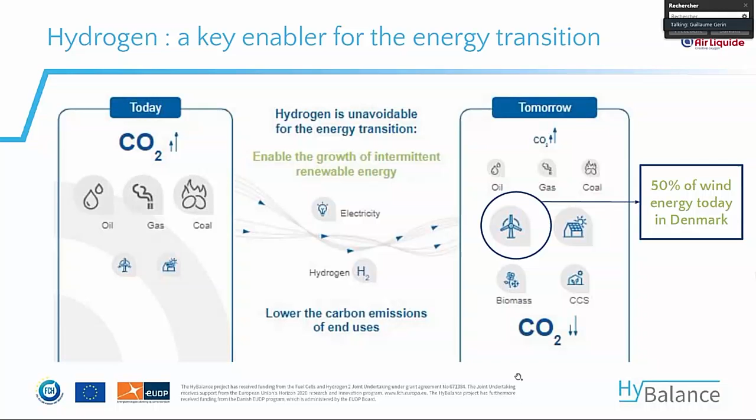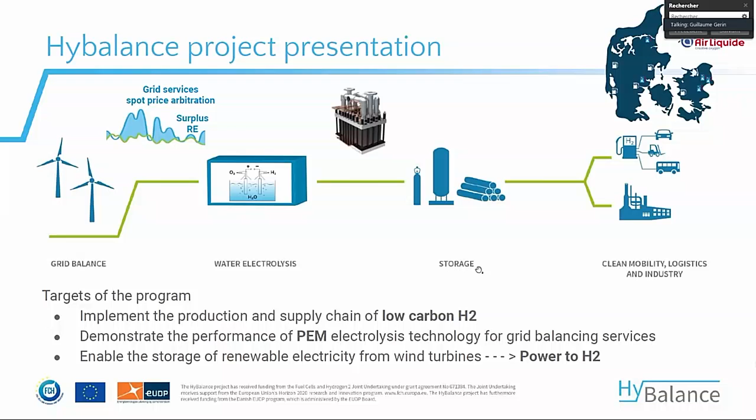Looking at the project in more detail, the idea of the HyBalance project is to demonstrate the overall chain of power to hydrogen - from the production via water electrolysis, basically using wind energy from the grid, making low carbon hydrogen. This also includes storage of the hydrogen, which acts as a buffer. The idea is to produce hydrogen when there is a lot of wind energy in the electricity grid, so that we can store this excess electricity as hydrogen and later supply it to customers, both for the mobility market and the industrial market.

Another very important point of this project is to demonstrate the maturity of the PEM technology. This is an important step because it's a first-of-its-kind plant in real operation under industrial conditions. This technology is very interesting for providing grid services, especially on the primary markets, and also to regulate the secondary and tertiary frequency markets. So this gives a global overview of the program and explains the principle of power to hydrogen.

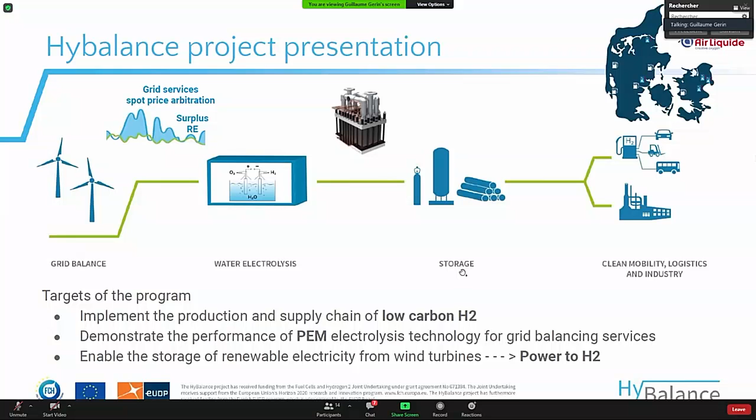Looking at the figures of the program, it started in October 2015 and will end at the end of this month. We are almost completed, but that doesn't mean the HyBalance plant will stop producing hydrogen - there are a lot of hours ahead where the HyBalance plant will continue to perform. To give an overview of the project budget, this is a 15 million euro project with a very important contribution from the Fuel Cell Hydrogen Joint Undertaking, more than half of the budget, for which we can thank them.

And another important contribution is from the Danish authorities, EUDP, at a level of 2.6 million euros. So just to give an overview also about the partners.

As explained, we have Air Liquide, who is in charge of the project management and the construction and operation of the plant. There is also LBST, who is in charge of the environmental assessment and coordination of this task. We have Hydrogenics, now Cummins, who have manufactured the electrolyzer and installed it also on the plant, and doing also some maintenance on that.

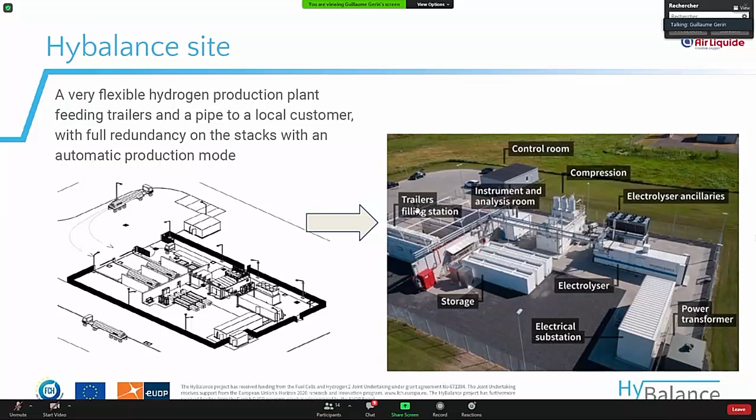So this is for the introduction of the HyBalance program. I will give the floor to Tejs Laustsen Jensen to present session 1 and to introduce the different partners.

Thank you very much for that, and thank you for the presentation and the introduction to the program, it was very informative and thoughtful. Thank you also to the whole consortium for inviting me to moderate today's webinar. My name is, as Guillaume mentioned, Tejs Laustsen Jensen. I'm the CEO of Hydrogen Denmark, the national Danish hydrogen and Power-to-X organization. In that capacity, I also want to express my admiration for the partners for making the project come true. But also, I have the pleasure of being a board member of the EUDP, and as Guillaume mentioned, we have contributed also to the funding of the program. So in that capacity too, it's very nice to see that the project has moved along so well. But again, it's not my point here to say too much, it's my point to moderate what everybody else is saying and telling us about the project.

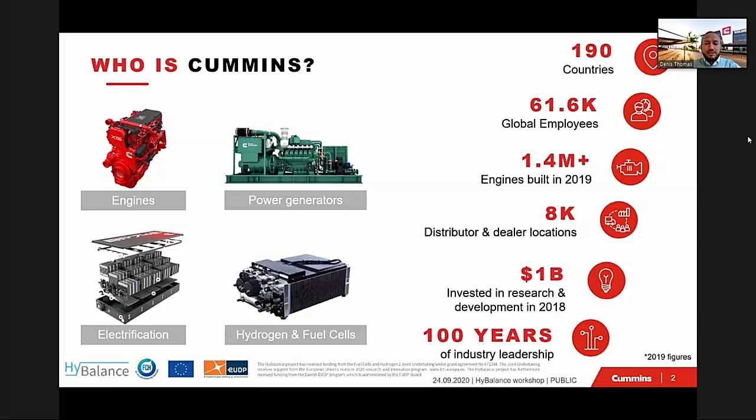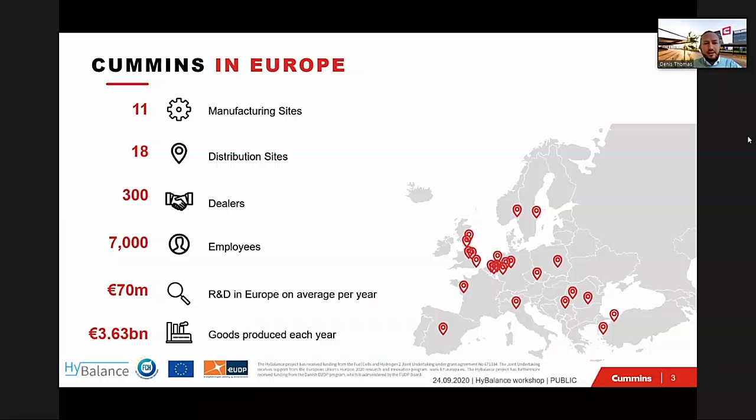Cummins is a true global company with a presence in more than 190 countries and more than 60,000 employees. The company owns its own distributor and dealer locations, with more than 8,000 locations, and invests quite massively in research and development. In Europe, we have more than 7,000 employees, 11 manufacturing and 18 distribution sites.

To summarize the activities of Cummins in the field of hydrogen, we work on several technologies: alkaline and PEM electrolysis, solid oxide and PEM fuel cells, and recently hydrogen storage tanks. This is mainly due to acquisitions and partnerships, with General Electric on solid oxide fuel cells, the acquisition of Hydrogenics which was the most important one for electrolysis and PEM fuel cells, a partnership and participation with Loop Energy in Canada, and a joint venture with NPROXX in Germany for hydrogen storage tanks.

The idea is to provide a complete hydrogen solution for both the mobility sector and hydrogen generation. In Europe we have two main manufacturing sites: one in Belgium, where the electrolyzer system was built for the HyBalance project.

We also have another site in Germany busy with fuel cell integration, for instance the integration of the fuel cell in the hydrogen train of Alstom.

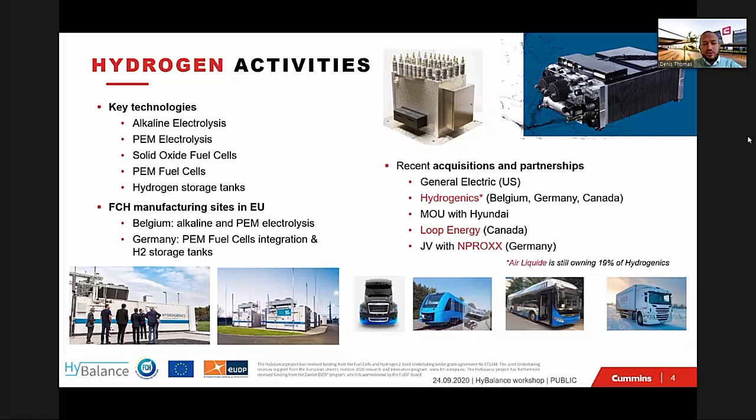HyBalance was a PEM water electrolysis project, and its timing fit perfectly with our technology roadmap at the time at Hydrogenics, because we started working on PEM already in the late years of the previous century, doing R&D especially from the PEM fuel cell team. We had a small product already in 2003, but at a very small scale.

It's really in 2012, when we saw the first signs of the real energy transition, that we decided to invest in PEM technology, especially for megawatt scale capability. In 2014, we manufactured our first 1.5 megawatt cell stack, which was installed in a project in Germany, our first real megawatt project.

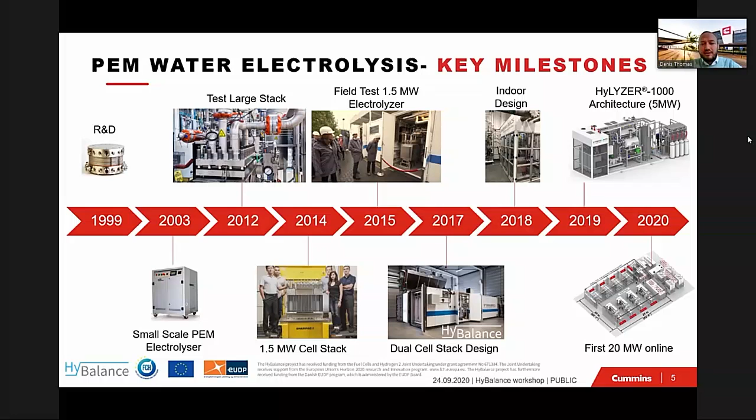But the real interest of the HyBalance project, which was decided in 2015, was to test a dual cell stack, meaning two cell stacks in the same system. After HyBalance, there were additional developments that will be presented at the end of the presentation.

Let me give you a view of the core technology deployed in the HyBalance project. It's based on a PEM cell stack, in this case a 1,500 square centimeter PEM cell stack. The cells are placed horizontally, and the maximum capacity of this type of stack is 250 normal cubic meters of hydrogen per hour, equivalent to more or less 1.25 megawatts nominal capacity, with the possibility to operate in overdrive mode.

This view of the HyBalance project has already been presented by Air Liquide, but you can see the electrolyzer located at the top right of the picture.

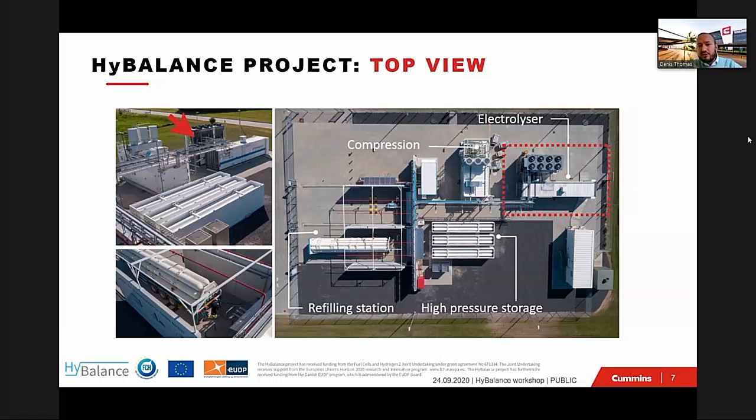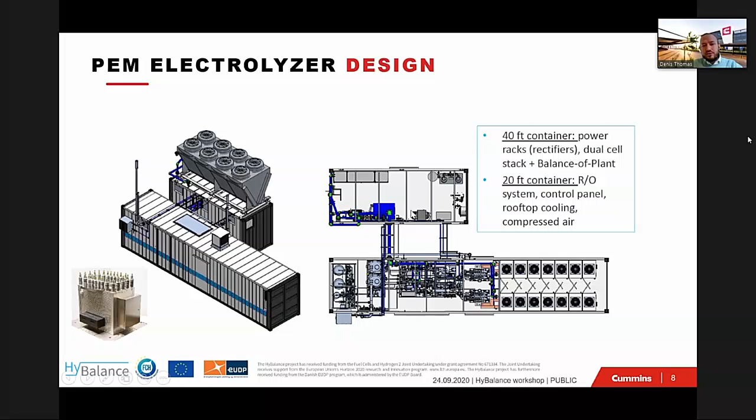If we look a bit deeper into the technology, it's made out of two containers. One 40-foot container includes the power rectifiers, as well as the stacks and what we call the balance of stack or balance of plant. The second container holds all the utilities: the reverse osmosis system, the control panel, a big rooftop cooler, and also an air compressor.

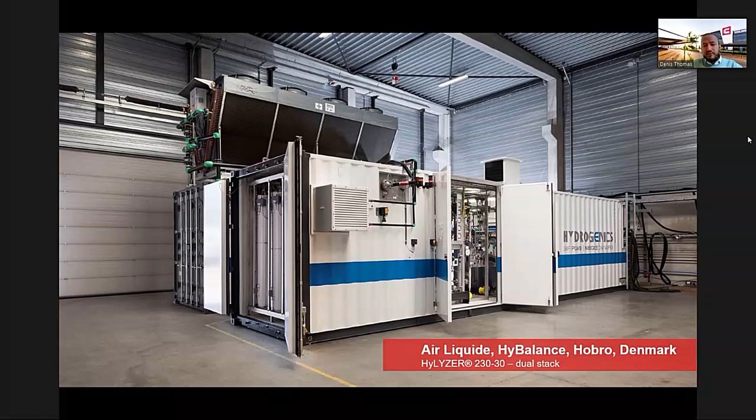Here is a view of the unit before delivering it to Denmark, still in our factory in Belgium at that stage. And here is the system deployed on site in Hobro, in the center of Denmark.

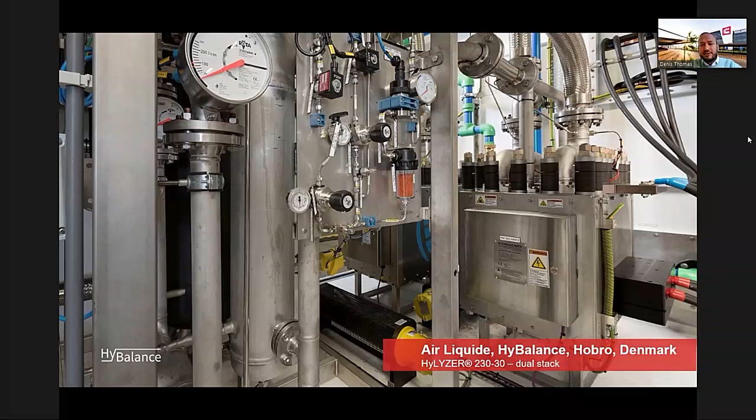Here is a view of the inside of the electrolyzer, where you can see the two PEM stacks, which are connected on the right side and then connected to the rest of the plant.

What are the lessons learned from this project? For us, it was the first of its kind, where we were using 2 PEM cell stacks running in parallel and sharing the same balance of stack. So we have made a lot of hardware and software improvements on this project. It was a real pilot project, so we had a lot of troubleshooting to be done, and that's actually the aim of those projects, to test new things, and that's why the FCHJU is financing and helping those developments, and EUDP as well.

We tested quite well the dynamic response of the electrolyzer, and it was validated during the testing phase. We have learned a lot on the dual stack operation and also on the maintenance of the system. Considering the pilot nature of the project, we have achieved a very reliable operation.

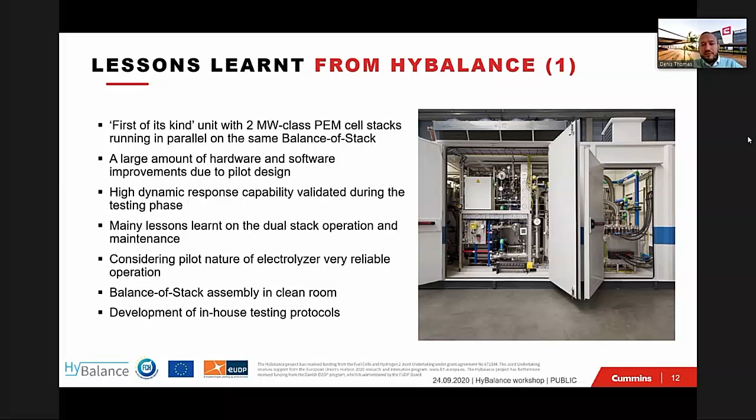On the manufacturing side, we have also made some improvements in the way we were manufacturing those types of units, working in a clean room environment for the assembly of the balance of stack. We have also developed in-house testing protocols, especially for the factory acceptance test, considering the new nature of this project.

Concerning the installation and operation of the electrolyzer, the installation, or I would say the unloading, was done in 1 day. I encourage you to have a look at the video, which is present on the HyBalance project website, where you will see it and also a lot of pictures of the project.

Concerning some of the lessons learned, what we can tell about PEM technology is that water quality is one of the most critical elements when we want to operate a PEM electrolyzer. It is crucial to prevent any contamination of the water, which would in fact contaminate the stacks. And I can tell that we have had some issues on this project. So we had to develop a procedure to exchange the stacks on the HyBalance unit. This is one of the main learnings that we have made on this project.

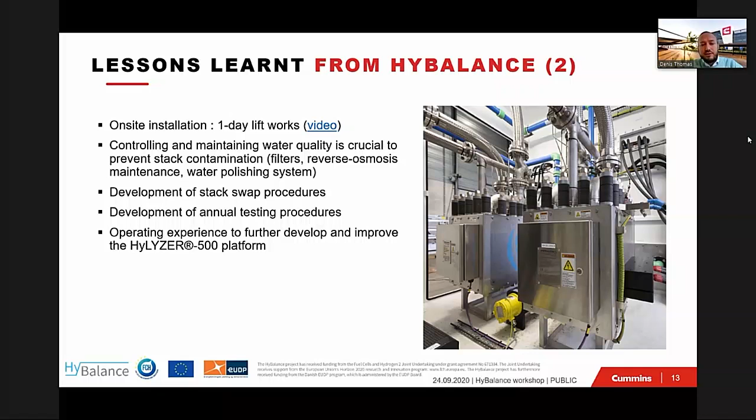And we've made quite a lot of improvements on the water controlling elements - filters, reverse osmosis maintenance, but also a lot of improvements in the water polishing system, which is constantly controlling the water quality in the system. We have also developed annual testing procedures to make sure that we could control the main parameters of this type of unit, and obviously gained a lot of experience to develop this product further.

Concerning the main numbers of this project, we have produced more than 120 tons of hydrogen, and those have been delivered to the end customer. In terms of operating hours, we are close to 14,000 operating hours. That unit was operated quite continuously over the last 2-3 years, delivering also grid balancing services.

Concerning the system efficiency, including all the utilities that I have presented - we monitor all the electrical consumption of the 2 containers that have been presented - we have achieved an efficiency of 56.5 kilowatt-hours per kilogram of hydrogen produced, while the target from the FCHJU call was set at 57.5. So I would say we succeeded in this respect.

On the cell stack, we managed to operate them asymmetrically. So we could operate on one stack, or on the 2, or at a different power on the different stacks. That was an important learning also for us. In terms of reaction time, in real operation, we could deliver services in less than 10 seconds. But in fact, the system is able to react quicker than those 10 seconds - in hot state, we can go to any power set point in less than 2 seconds.

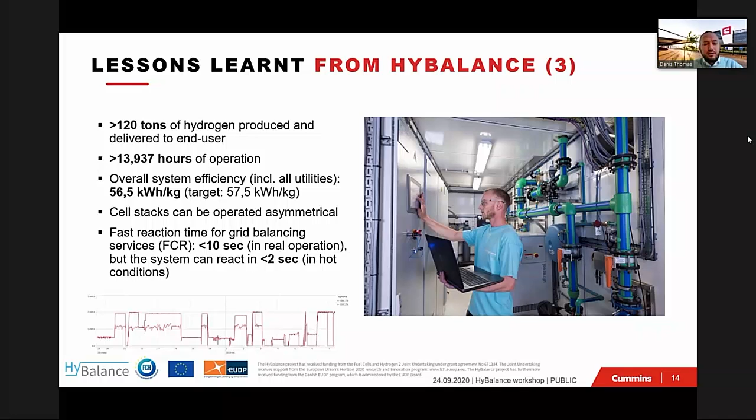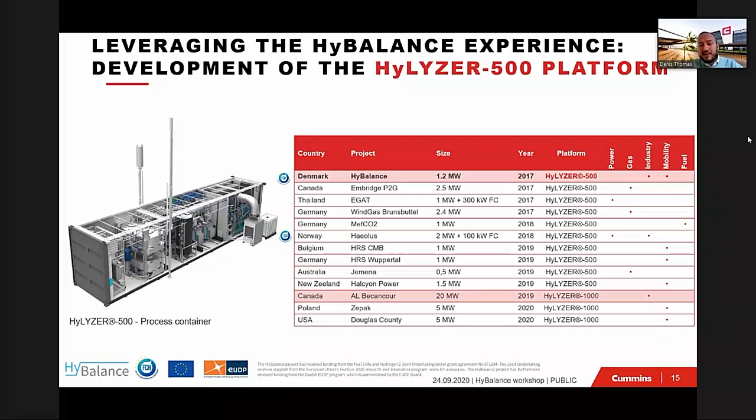Obviously, the HyBalance project has been a very important project for us. It's on this project that we have developed the dual stack platform, which we call today the HyLyzer 500. This HyBalance project has allowed us to develop a number of additional projects - you see them there on the list. One of them is the Haeolus project, also funded by the FCHJU, which is today in the installation phase. And we are not stopping there - we are also developing at the same time the HyLyzer 1000 platform, which will be the main part of the last part of this discussion.

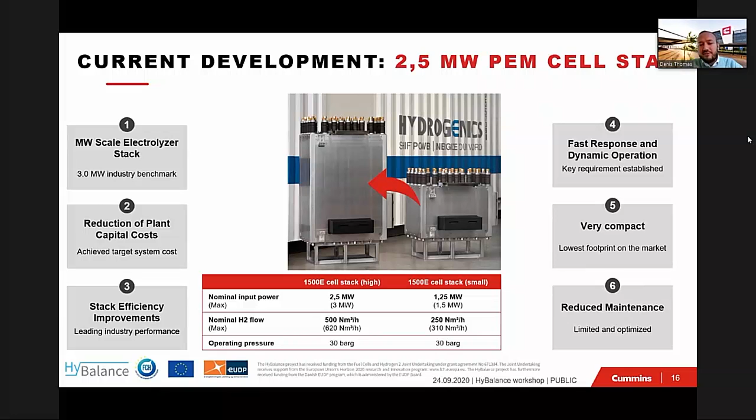So what is happening after HyBalance is that we are currently upscaling our PEM cell stack by doubling the amount of cells, because the cell stack which was used for HyBalance is presented on the right side, and we are developing the cell stack presented on the left side, to achieve a hydrogen production capacity of 500 normal cubic meters of hydrogen per hour. Good to mention is that the operating pressure, the design pressure, is 30 bar for the system, which is quite advantageous. This upscaling of the stack is also organized together with a new product development on our side, which is called the HyLyzer 1000.

That's the unit that you see here on the left, which contains the two cell stacks of 2.5 megawatt each, on which we have developed what we call the balance of stack, containing all the water equipment, the cooling of the system, all the safety instrumentation, etc.

And we are building today a 20 megawatt project together with Air Liquide in Canada for an industrial customer. This plant contains 4 HyLyzer 1000, for a total capacity of 20 megawatt, each connected to a single rectifier. Then all the balance of plant is organized by Air Liquide, where you see a central cooling system, a central hydrogen purification system, a central water purification system, and also a central medium voltage system. This unit should be operational by the end of this year. We are today busy with the commissioning.

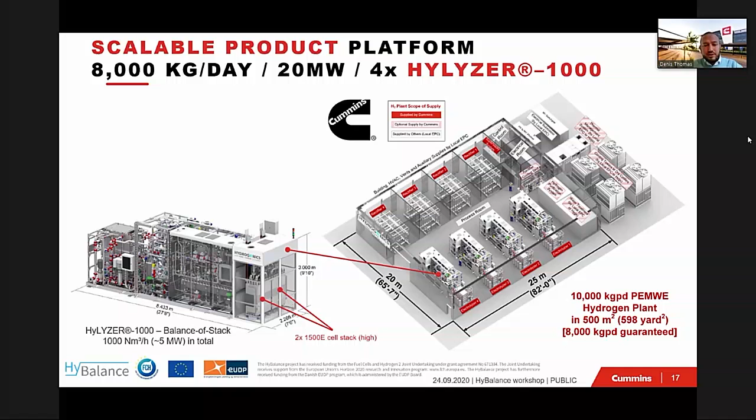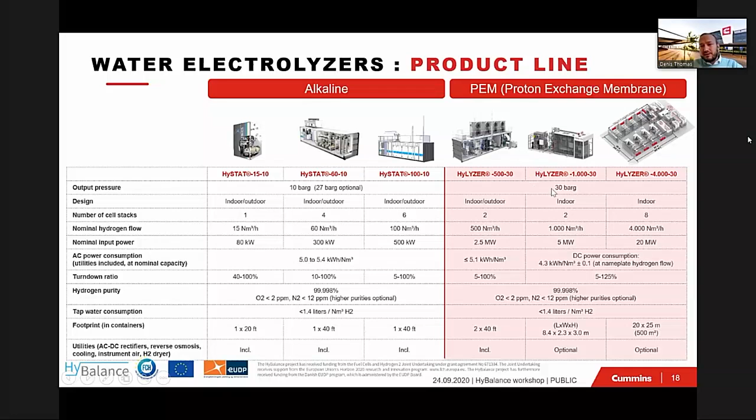I'll not spend too much time on this, but here is a summary of all the products of Cummins today concerning the electrolyzer. The HyBalance project has really allowed us to develop this HyLyzer 500 platform, which is a containerized system, and everything I presented for the HyLyzer 1000 are indoor units.

So what are the conclusions from our side? Obviously, we have made a lot of learnings, and we managed to convert them into a commercial product which is today available and deployed on several sites. The good news also for everyone in the project is that the HyBalance unit will continue its operation after the end of the funding period, meaning the system is operating under economical conditions.

As I've presented, we are building now the 20 megawatts, so we are getting prepared for the gigawatt era of hydrogen technologies. We want to say a big thank you to all the HyBalance project partners, which have allowed this project to be a real success, and also a big thank you to the funding authorities, the FCH JU, and the Danish EUDP program. Thank you very much for your attention.

Well, thank you very much for this very interesting presentation. I think we got, at least I did, a very good understanding of how the project worked, and how it will be able to help in the developing of the electrolyzer technology. That was very interesting. Thank you very much.

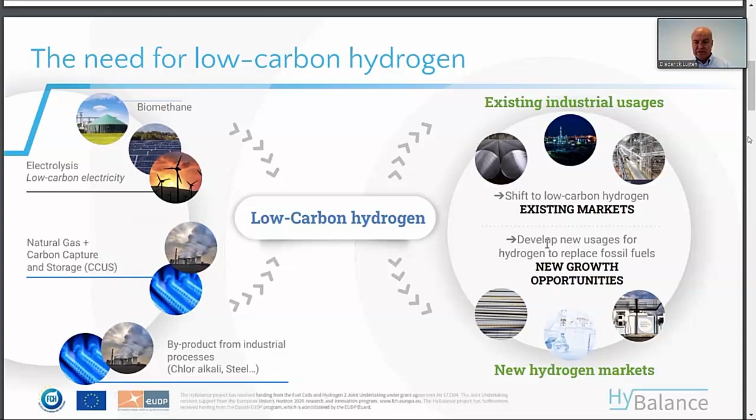And then last but not least is the production of synthetic fuels, more the power-to-X market that Tesh also mentioned, which is an important market. Apart from that, there's a lot of conversion needed for natural gas in the pipelines of many gas and infrastructure operators, where hydrogen needs to be injected more massively and generated by renewables.

And there's also, connected to this plant, a partner customer that is using the hydrogen through the pipeline network directly. So it's a base load on the plant that we use, and we buffer as much as possible, catching up for all the fluctuations of consumption in the pipeline network.

This plant is unique in the sense that compared to some other techniques, it delivers a very high quality product of hydrogen that is directly suitable for fuel cell consumption, as fuel cells are pretty sensitive to certain pollutants in the gas. So not all methodologies are usable directly into fuel cell technology without purification. This plant does, which is one of the big lessons learned, and also one of the upsides.

And so what we generally serve is the glass fiber market. We are in the oil and gas market in Denmark, steel manufacturers, and there's a lot of opportunities also to develop in the Hydrogen Valley, where we are proudly part of in the Hobro area, where some new needs are coming up.

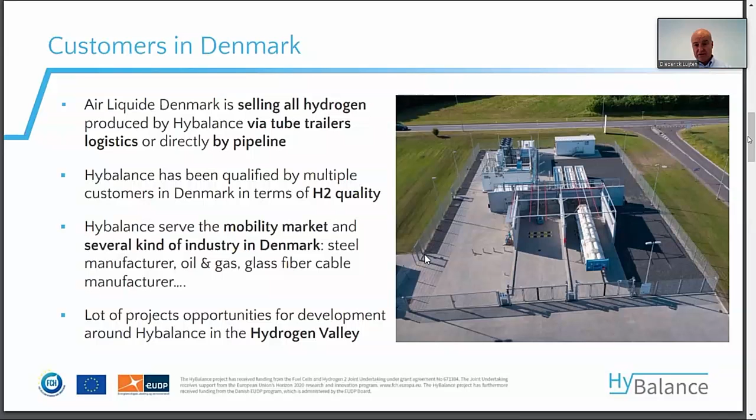Like large-scale fuel cell testing for one of our important customers. There's some power-to-X projects that would like to be tested small scale in laboratory phases and so on, that we can get around the plant. But also the university or some food markets are very interested in joining up and seeing how we can explore the site together and optimize the consumption.

We have still some product available. To get to the engineering, procurement, and construction phase of the plant, to give you some background information, we have 40 orders of equipment being sent out, so this is still very reasonable. We had very good subcontractors helping us there, already aggregating some of the techno bricks and doing that for us.

There's a lot of concrete into this site, 230 cubic meters, and a lot of steel also to reinforce that, 69 tons. And only the civil works already required roughly 4,500 man hours. This is very important because of the stability of the underground that we need to realize, because of the compression part and the vibration of the large compressors that bring the pressure up to 700 bar at this location.

So we do different stages, and we can buffer up to more than 900 bars at the station. Then there's the mechanical erection: 400 meters of pipe, 3,000 man hours. And the electrical and instrumentation part, where there's 18 kilometers of cable into the site, 5 tons of material, and also more than 4,000 man hours.

So this is, let's say, the hydrogen piping also that we have used at this location is up to 1,000 bars, as we are compressing, let's say, an operating pressure above 900, and of course 1,000 bars is up to the working pressure of those pipelines. I think the bursting pressure is much higher.

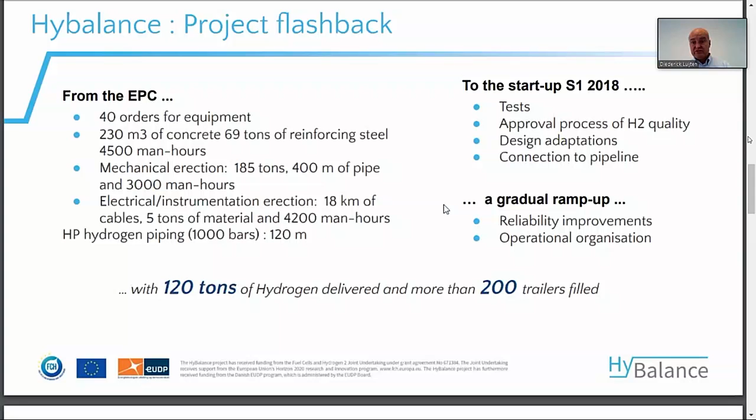So we have 120 tons, as mentioned, being produced, and more than 200 trailers being filled. Taking into account, of course, that we did a lot of testing and operations challenges at the location, because it's also a research project and dissemination to be done like today.

So some operational results: we have 14,000 hours of operation. You see the curve where there's some spots where we were a little bit weaker in production because of some repairs, some modifications to be done to optimize the plant for the future. Overall, it has been operated with very good results on the technical performance.

Also, the PEM technology was a good technology that we integrated here, thanks to Hydrogenics and Cummins.

So in terms of plant certification by the Transmission System Operator, we've been very active on the frequency containment reserve, meaning that we have the grid balancing, where we can, as it was shown, react very quickly between 10 or 2 seconds to regulate the frequency, or to help regulate the frequency for the grid operator.

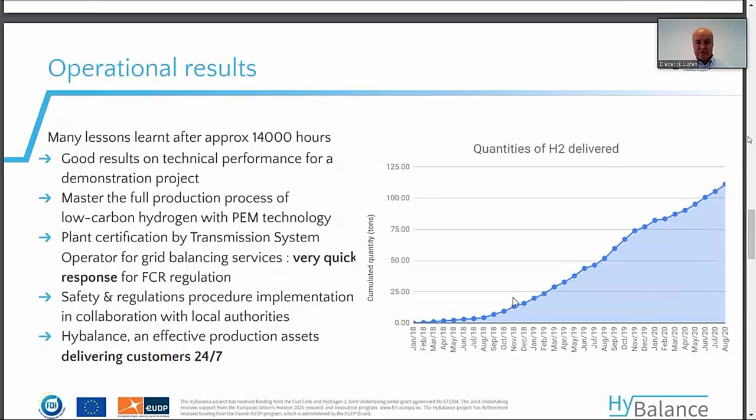Of course, safety and regulation was a point in the installation, so to install it, but also to get all the procedures in place, having the firemen and everyone around the site being trained and also understanding what we do. So this went all successful, and we are delivering now our customers 24/7 without interruption, which is a very nice result, I think, of all the teams that work together.

Some economic results, we make that relative to each other, but here you can see the cost stack of what we have realized within the project, as it is still a relatively smaller scale project of a 1.2 megawatt electrolyzer. There's a capex part which is almost identical, let's say, in our P&Ls, to the OPEX part, but also to the electricity costs. So it is quite in balance for the three blocks.

If we go to larger scale electrolyzers like we are installing today in Canada, you see that we already make a significant step into the future, where the electricity costs become more dominant than the operational and capex part. And even when we go further, and this is on our roadmaps for larger scale production of 100 megawatt, we see that the energy cost is playing a dominant factor, meaning that the grid balancing and everything we do and the lessons learned that we have from this location is absolutely very, very fruitful to optimize the cost of the intake of energy, which needs to offset, let's say, the capex and opex cost on a location like this.

One of the lessons learned also is that the auxiliary, so everything that we consume in terms of energy or cost around the plant itself, is significantly ramping down the more we get into a scale-up, and it goes from water treatment to computer systems. Everything that we have around the plant is important to get optimized, including the compression capacities. So the more we scale up, the better we will become in terms of competitiveness.

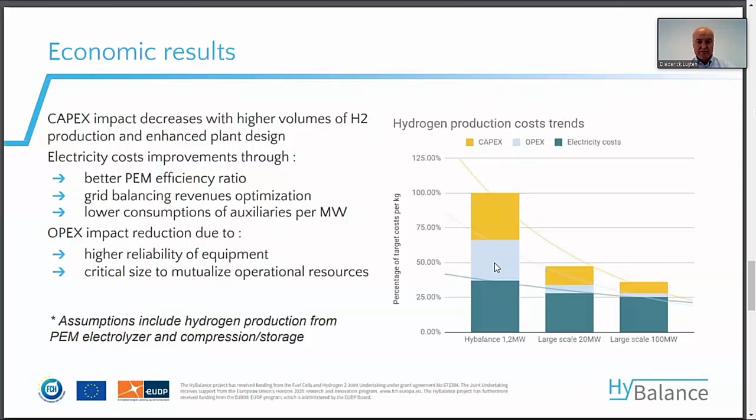So where do we stand today from our perspective? We started with 30 electrolyzers worldwide in operation within the group, with a range of 50 to 100 cubic meters an hour. We're now at 250 cubic meters an hour in the Hobro plant.

The next one is under construction, being commissioned as we speak. It's the Bécancour plant in Canada, which for us is a big step up—it's the largest under construction in the world today. The next phase we're working on is to get to a 200 megawatt scale, so we're actively developing this kind of project from a group perspective with all our partners.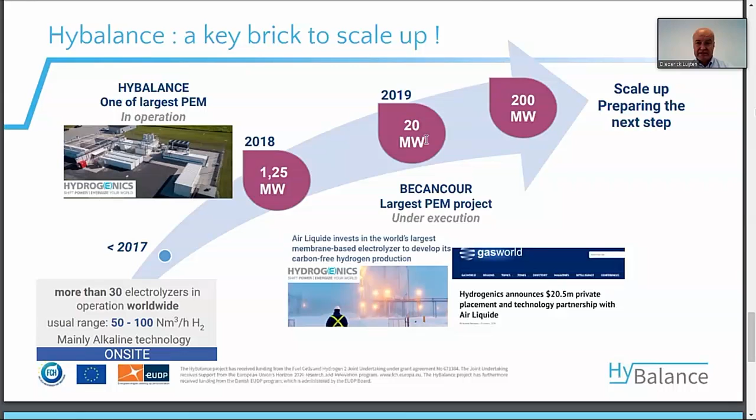So there's a lot of lessons learned, and a lot of things that we already integrate into our new plant operations.

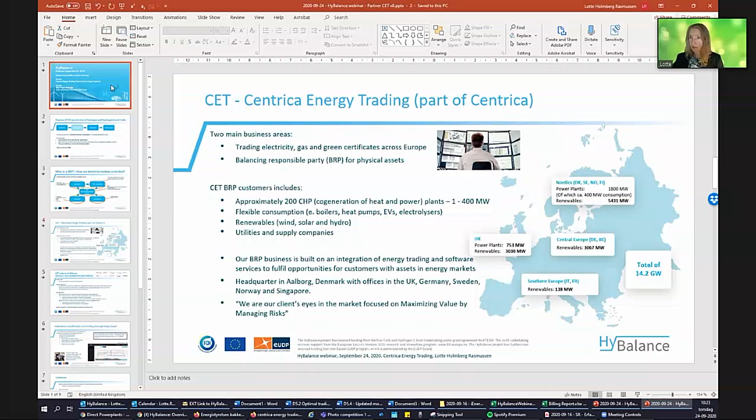Thank you very much. I just need to make sure that you can see my screen. Here it is. Thank you for the introduction. I'm from Centrica Energy Trading in Aalborg, which is quite close to Hobro. We are a part of Centrica. And I will tell you about our role in balance responsibility and grid balancing in the HyBalance project.

First of all, a little bit about how power-to-X, or production of hydrogen, is seen from the electricity system—namely as flexible electricity consumption. That's one important part. The other is converting the electricity to some kind of fuel, hydrogen and other e-fuels. The important part is to use electricity when prices are low in the spot market, which you can plan the day before, but also to use electricity for balancing the electricity grid in the hour and day of operation, sometimes called ancillary services or system services.

So the grid balancing is done by the electricity markets, and that's why there's a need for a BRP. I'll tell you a little more about that. There's also of course a need for every other kind of participant, but the BRP is important.

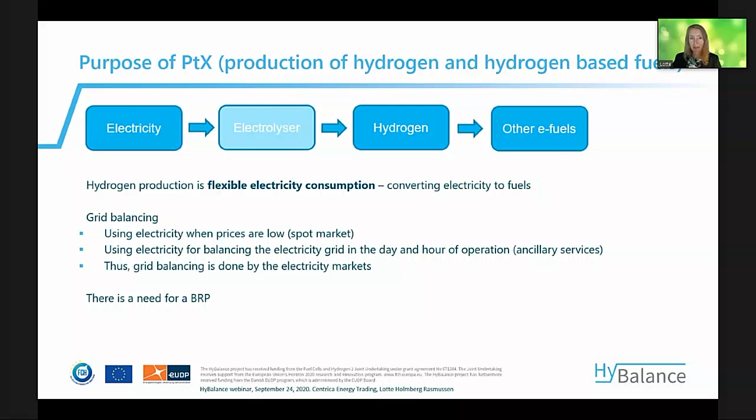The producers and the consumers will bid into the markets through the balance responsible party, and these bids will be sent on to Nord Pool, which is a spot market, and other markets, and to the TSO, which handles the balance in the day of and in the hour of operation.

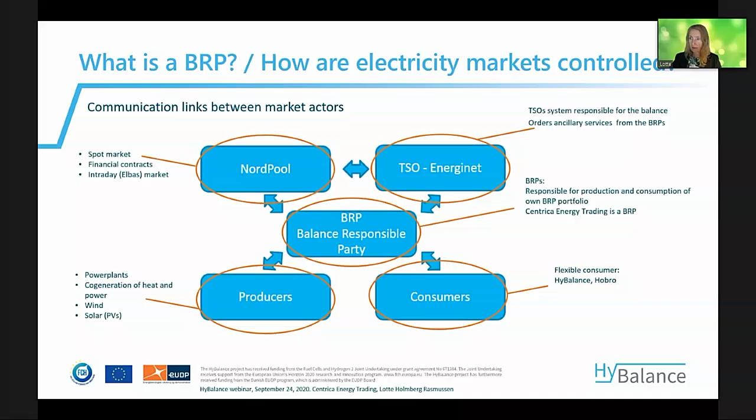A little bit about what Centrica Energy Trading is. As I said, we are part of UK-based Centrica. Centrica Energy Trading is the name of the Danish part of Centrica. We have two main business areas: trading electricity, gas and certificates all across Europe, and being a balance responsible party for some physical assets.

On the map, you can see the total that we are BRP for—a total of 14 gigawatts, or 14,000 megawatts. Many of those are CHP plants; we have approximately 200 CHP plants as our customers, in all sizes from 1 to 400 megawatts. So we have done optimizing and advising for many years.

There's also more and more flexible consumption coming into our portfolio from our customers. Electric boilers were some of the first; heat pumps are really starting to pick up now. We also have some EVs, and of course now also electrolyzers—HyBalance and another plant too. We expect there to be a lot more of those in the future. Then we also bid in for renewables and utility and supply companies.

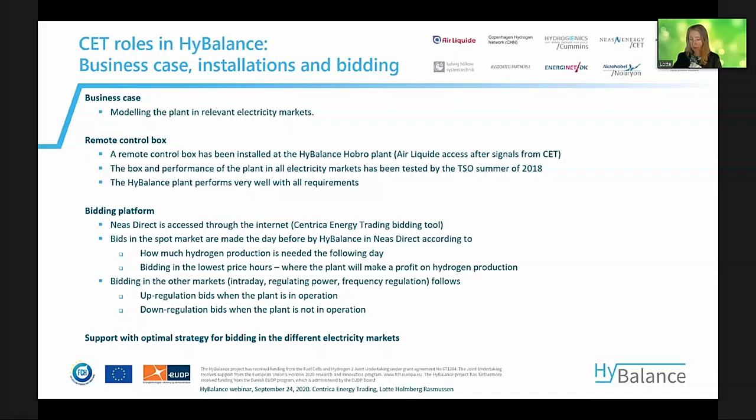Our role has also been to support the optimal trading strategy for bidding in different markets and looking at which markets are most valuable.

A little more on the electricity markets. The electrolyzer at the HyBalance plant, and other electrolyzers too, can participate in all possible markets. DK1 is the price area where HyBalance is located, and there are different markets I'll mention shortly. There's a spot market, bidding done the day before. There's the intraday market, where you can bid up to 1 hour before. Then there are ancillary services, manual reserves, and the regulating power market.

A form of regulating power market is the special regulation, and these days there's a lot of money in this market. There's also the frequency reserves market. As I mentioned, these markets change. 3-4 years ago when the plant was built, it looked like there was a lot of value in the frequency reserves market, but now the value is more in the regulating power market and the special regulation power market.

The plant will bid in through our platform, and we'll send a signal back on whether we've won in the different markets. Our operation officer will keep an eye on the plant to see if it's running according to the bids.

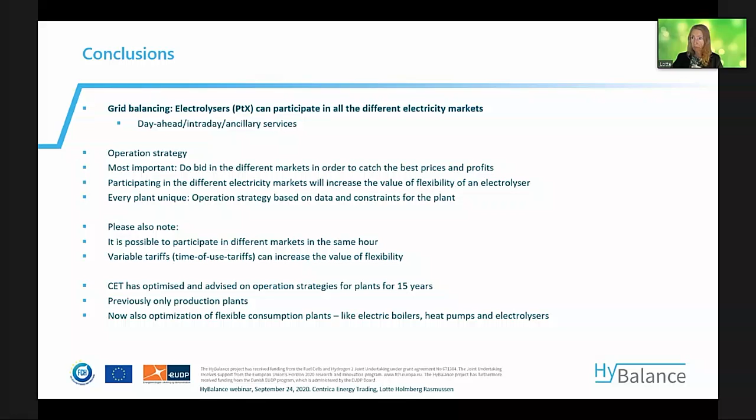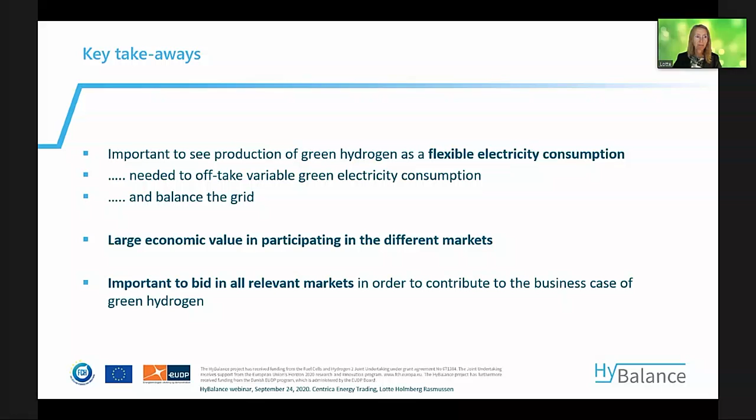Thank you very much.

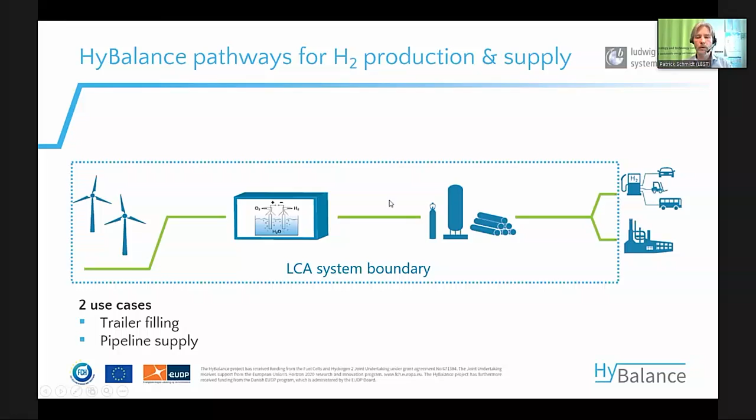It's always important to understand the boundary of a greenhouse gas balance - the life cycle assessment system boundary. We have two cases here with the HyBalance plant, as mentioned by Guillaume and the others: there is, on one side, trailer filling at the two trailer filling sites in the HyBalance plant, and there is this pipeline supply to industry. So both have been covered with our greenhouse gas balances, which go all the way upstream from the HyBalance plant, including the renewable power supply. We have assumed any grid losses here, but we've not assumed, in line with the Renewable Energy Directive methodology, the CAPEX-related greenhouse gas emissions. So that's actually the balance as you would do it for a Renewable Energy Directive calculation, getting acknowledged the renewable energy share if you would use it as a fuel.

So it's always important to see what is the fossil reference. Here in our case of HyBalance, most obviously the fossil reference is natural gas used in a steam methane reformer and then trucked from Germany to Denmark. That's the case the Danish market is facing for the supply of hydrogen until HyBalance came into place. One reason, as already mentioned, why choosing Denmark - besides hydrogen having to be trucked in by Air Liquide for the Danish customers - is also because it's been so progressive on renewable energies.

And as a boundary assumption, we've been calculating that the reduction of greenhouse gas from hydrogen produced from wind energy is more than 95% if you would go for 100% dedicated renewable power to the HyBalance plant. Again, the bit of greenhouse gas emissions that you see on the left downside for the trucking is that we simply assume for the time being that the diesel used for the trucking of 100 kilometers of the hydrogen is still fossil diesel.

So it could be replaced easily moving forward with alternative powertrains and renewable or low carbon sources for the trucking as well. Now, we've made some sensitivity assessments.

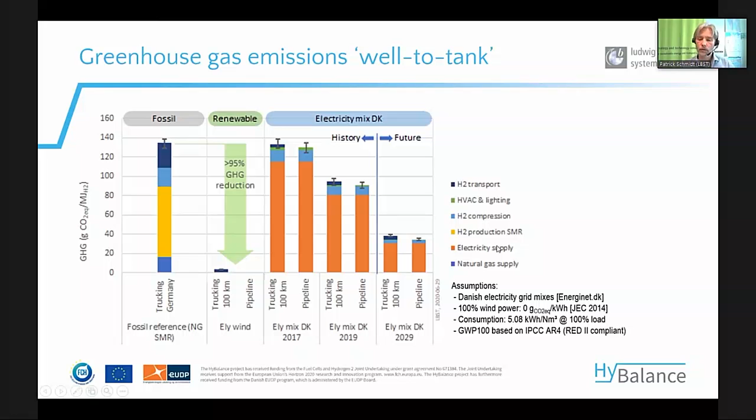There's an interesting thing that also ties into Lotte's elaborations. We made a correlation analysis on an example half year, looking at how grid prices correlate with CO2 emission carbon footprints. Energinet DK gives a very detailed time series for past grid mix carbon footprints, and our correlation analysis shows a very high correlation between low grid prices and correspondingly low CO2 emissions in the grid.

So in principle, you could orient your hydrogen production according to the grid price, but as a cautionary note, these markets can change. Small changes in the assumptions on how the market price establishing rules are built will certainly lead to different results in these correlations.

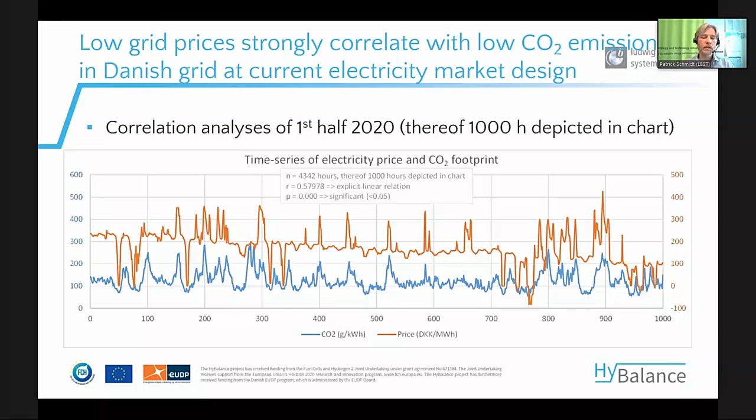For that reason, we did a simulation over a half year, the first half of 2020, looking backward on historical data and timelines, using the CO2 footprint information from the first half of 2020 to calculate what would happen. What we have at the moment, or in 2019, the latest established data, is a carbon footprint of 135 grams CO2 equivalents per megajoule of electricity production in Denmark.

If you produce that annual grid mix with a HyBalance plant and its specific consumption, you end up with around 90 grams CO2 equivalents per megajoule of hydrogen.

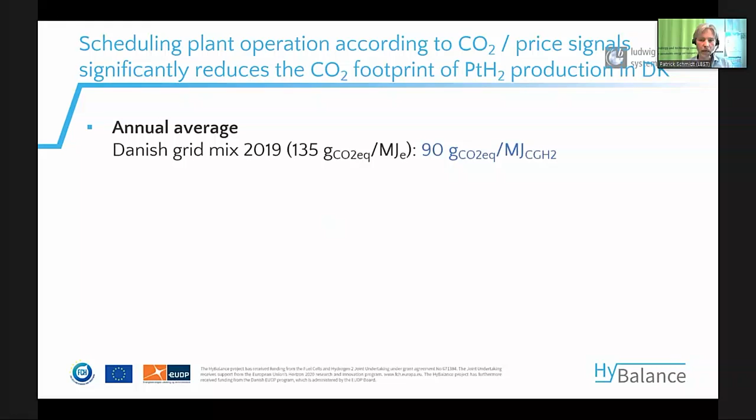Now, doing a simulation where HyBalance operates strictly according to demand-side management, with a threshold that it shall operate only if the grid carbon intensity is below 120 grams CO2 equivalent of the electricity mix, you end up with an aggregated greenhouse gas emission equivalent for the hydrogen of 40 grams CO2 equivalent. So simply doing demand side management with that threshold gives you an improvement of that magnitude.

We also looked into the equivalent operating hours from that, and you end up with an equivalent full load period for such plant operation, with the threshold mentioned, of more than 4,700 hours per year, which is actually very high.

If you compare using wind or wind power exclusively, you are rather in the magnitude of, depending on the site and whether it's onshore or offshore wind, in the range of 2,500, maybe coming up to 4,000 hours in very good sites, and with a PV plant only, rather 1,000 hours per year equivalent.

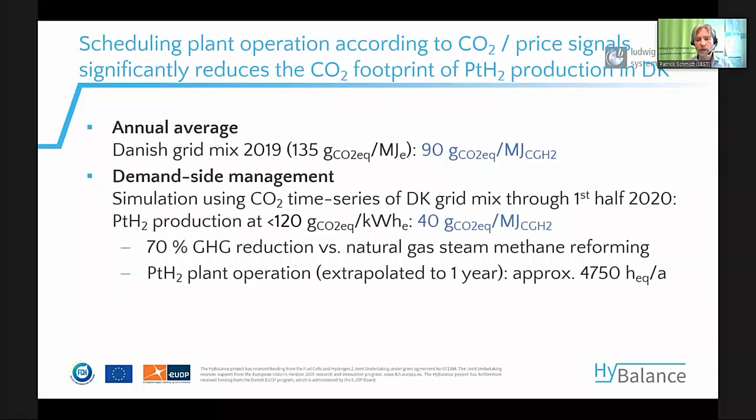So this is a way plants could be operated in the future, and I think this is very important to understand, because we are today in a discussion about what is renewable hydrogen in the end, and what is the renewable electricity to this end that can serve renewable hydrogen.

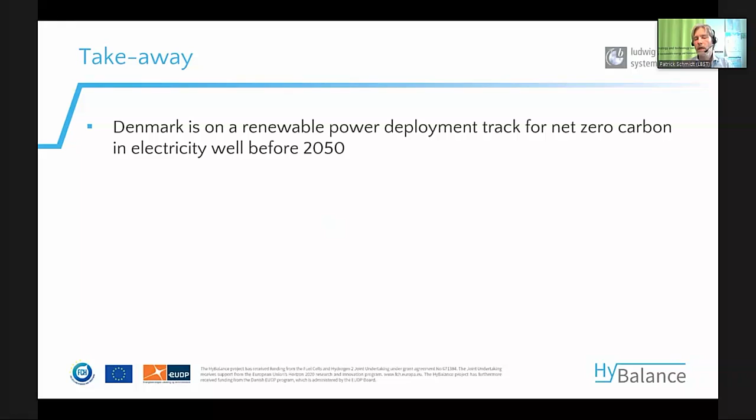As key takeaway messages from our analysis, I think the most important one for our discussions today is that Denmark is on a very good track for renewable power deployment by 2030, getting a 100% renewable share, and that well before 2050. That's a very robust development looking at the grid mix development.

And power to hydrogen, Lotte also referred to that, is a key building block in that energy system integration, especially for those fluctuating parts. Demand side management of such plants is thus important. And in order to balance and integrate in a full system perspective, of course, grid connection is important.

You could do it off-grid, no doubt about that. But if you want to have the additional benefits from such a flexible system, grid connection is of benefit, because then you can seek synergies and get the full system better integrated.

But of course it can't be that simple in the end before claiming renewable hydrogen had been produced. So there must be a simple but robust sustainability framework that is really needed for both ends. To the one end, towards stakeholders like Air Liquide and Cummins Hydrogenics that have invested here with public support at the moment, in order to make that feasible.

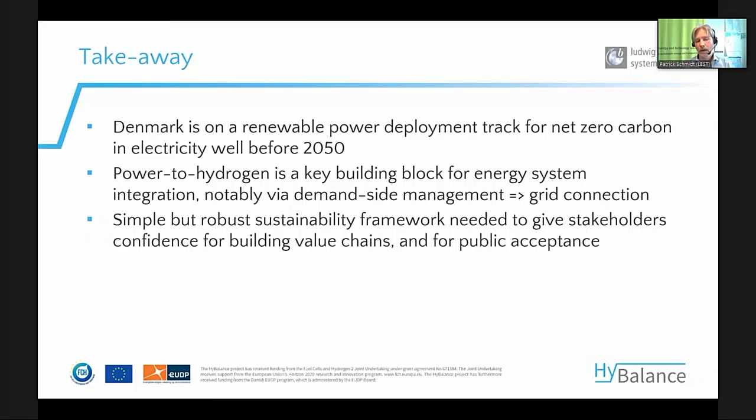But that confidence is needed for the stakeholders for further investments in the future and building the value chains for that. And of course, also to the other end, that's the public acceptance, and the public that is via taxes etc. also supporting that at the moment. For that, a simple but robust sustainability framework is really key.

And there are actually a couple of policy tracks at the moment on the EU level, also on regional levels, but most importantly for the HyBalance project, certainly the EU level. It's electricity market regulatory in general. So what is the role of electrolyzer and derivatives, hydrogen derivatives from electrolysis operations, and how is that with storage and other uses of this hydrogen?

What's their role and how are they taxed and how are they levied? There is the Renewable Energy Directive and the national implementations, but most importantly, over the next few months, the delegated acts really detail what actually is renewable electricity that leads to green hydrogen, renewable hydrogen in the end. So that's really key for telling in the end what's the greenhouse gas balance of such hydrogen that comes out of a power-to-hydrogen plant.

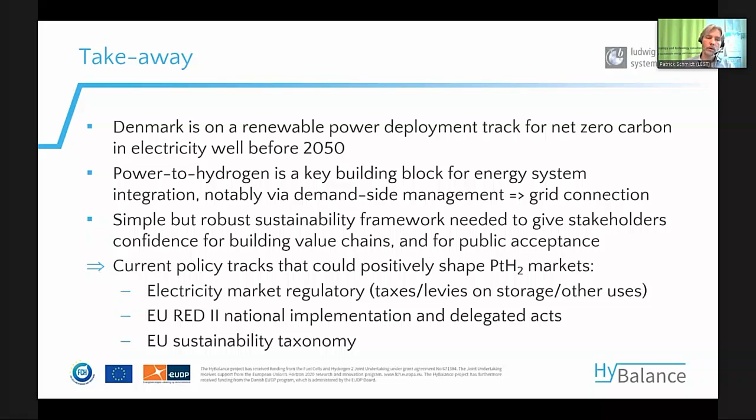And there's an EU sustainability taxonomy, of course, which will tell what is in the story and what's out of the story of green, or whatever color you want - what's in there and what's out there. So that's very important takeaways from the environmental performance side. I hope I've been fast enough to give some room for discussion. I'm happy to look forward to that as well. Thank you.

Yes, you were very good. Thank you very much, and again a very interesting presentation. I think that although we are a little bit behind schedule, we will of course have time for a few questions from the webinar chat and all the listeners around Europe and the world that have posed questions to the presenters. Perhaps starting with you, Dennis.

There's a number of questions regarding the electrolyzer. First of all, can you say a little bit more on the impact on the electrolyzer regarding degradation, especially when taking into consideration perhaps the last two presentations and scaling up and down production? Does that affect the long-term performance of the electrolyzer?

And secondly, there's also a question that you could perhaps answer in the same session, with regard to how you see, when you build larger and larger plants, whether you still see it as a modular containerized approach, or how your plants will look when you go to, for instance, 100 or above 100 megawatt. Maybe if we start with that, then we can come back to other questions.

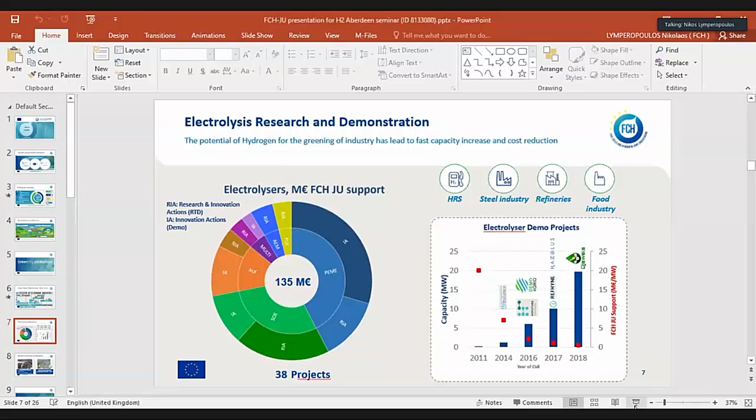Right, and to wrap up, yeah, it's been a great adventure, this. I will try now, if I can, to share one slide with you. Hopefully you can see this favorite slide of mine on the FCH-JU support to electrolyzers.

On the left, it's the millions of euro across 38 projects, different types of electrolyzers. And on the right, it's a little schematic of all our electrolyzer demo projects.

2011 is the Don Quixote project, a few hundred kilowatts, 150 kilowatt electrolyzers, again by Hydrogenics. Then we come to 2014, our first real pilot project for electrolyzers, HyBalance. This is a 1 megawatt, 1.25 megawatt electrolyzer. The blue bars refer to the axis on the left, the electrolyzer capacity of our largest electrolyzer demonstration projects. Also of interest are the red dots, on the right axis, the FCH-JU support in million of euro per megawatt of electrolyzer installed. You can see HyBalance here.

And then 2 years later, we had H2Future, the only other project with an up and running electrolyzer, a 6 megawatt atmospheric PEM in a steel plant. Demo4Grid is the next one to come online, a 3 megawatt alkaline electrolyzer in a food industry.

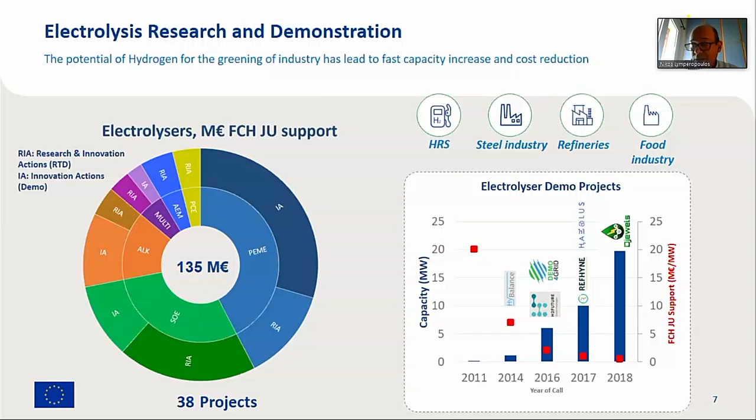Then the next year we had Refhyne, a 10 megawatt pressurized PEM in a refinery, and Haeolus, mentioned previously, which is going to be installed inside a wind park. In 2018, it's our biggest, a 20 megawatt pressurized alkaline electrolyzer project called Djewels.

And Mirela Tanasiu mentioned that there is a 2020 Green Deal call out now by DG Ener for a 100 megawatt electrolyzer that has half the support per megawatt that we provide for Djewels. So you can see the effect of economies of scale on one hand and improvements in the technology and the CapEx on the other.

But still, all this very impressive, but HyBalance has set the scene and provided all the right experience and expertise to this industry to be able to make this leap and allow hydrogen to indeed become a major player in the energy and environmental policy of the EU.